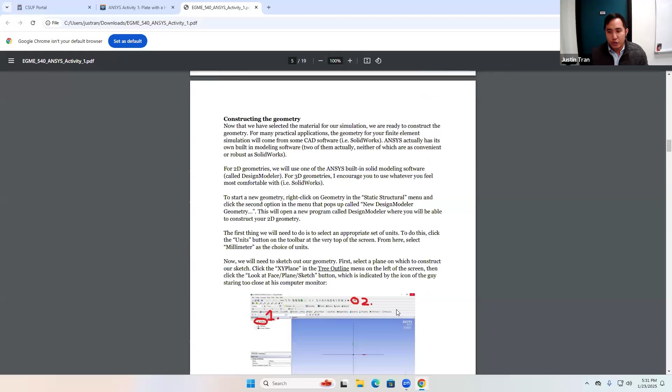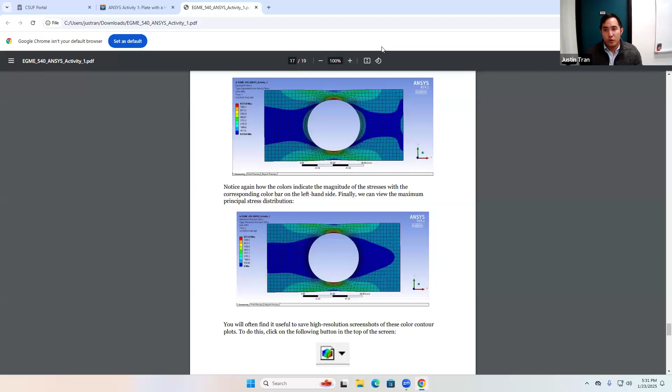So we'll be going through the whole process today, starting with the basics of booting up ANSYS, what you're looking at, all of the interfaces, because ANSYS is not the most user friendly. It's very feature packed, but sometimes sifting through all those features to get to the part you need can be a little difficult. This is kind of your first exposure to ANSYS, so if you have no experience with it, this is going to be great. If you've used ANSYS before, just follow along.

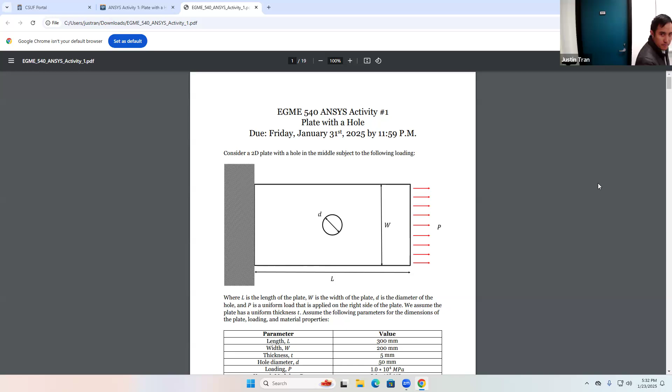Any questions on anything before we get started for today? Does ANSYS installed in this computer? Yes, they should be. So that is the first thing we're going to do, finding ANSYS is not the most straightforward. We'll open it together. Any other questions before we get started?

Okay, let's go ahead and get started. The first thing we're going to do is open up ANSYS. Now, if you had a chance to install it on your own computers, you'll see that ANSYS is actually a collection of a dozen or so different programs all meshed together. So to actually open up ANSYS, we need to open what's called the manager program.

The manager program in ANSYS is actually called Workbench. So if you're on a Windows machine like this, you can search up Workbench, or just type 'work', and hopefully it should pull up the application for you.

The lab computers here, because we renewed our license back in August of last year, should be running 2024 R1. But I think the most recent student version online is 2025 R1. There's really no difference between the versions, at least for what we're going to be using. All the features are going to be the same. The only issue you may have is if you're switching between versions.

So let's say you start working on something in class, and then you take it home and work in 2025. Just like SolidWorks, you could upgrade, so you can take your 2024 files and open them up in 2025. You cannot do the reverse. You can't start something in the 2025 version and bring it back to 2024. It only goes in one direction.

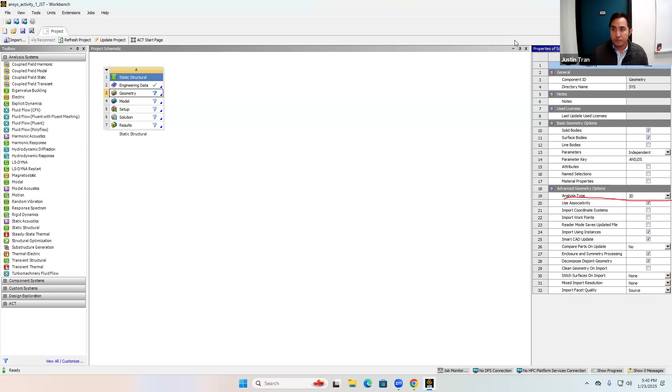We're going to go to one particular line, which should be line 19 for analysis type. Right now it's set to 3D because 3D is the default, but we're going to go ahead and change this to 2D. So again, in most cases you're not going to have to do this, but this activity is just a little bit special because it's a 2D analysis.

Next thing we're going to do before we make the geometry, let's go ahead and specify our material properties. Remember, we talked about on Tuesday that material properties is an important part of every FEA simulation because it defines how your structure is going to deform.

So to define the material properties, we're going to double click on this entry right here called engineering data. Let's go ahead and double click on that. It's going to be a little bit disorienting because it's going to change your entire screen, but it's going to bring up the material window.

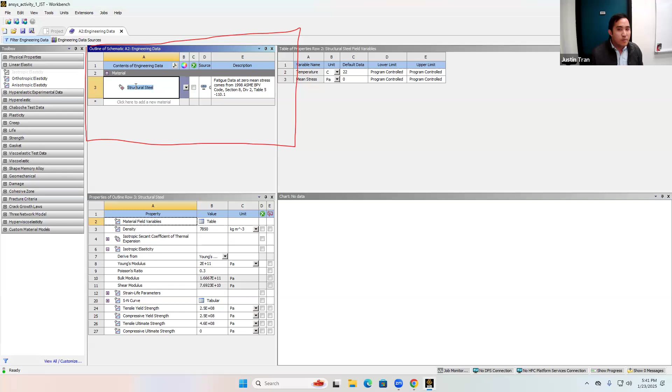First thing we're going to look at here is just the outline of the different materials that we have. You can see we have just one material loaded right now, which is structural steel.

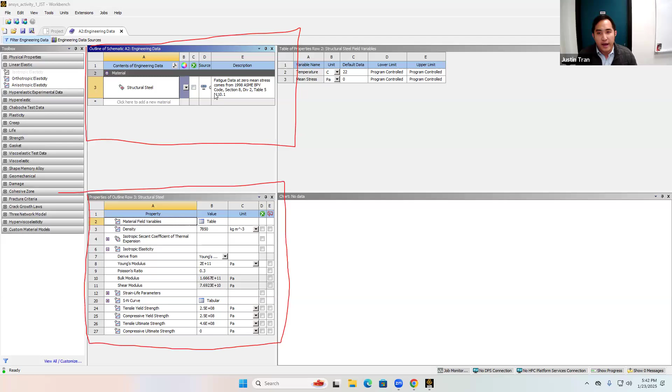But if you wanted to add multiple materials to your simulation, you would be able to add it up here. Next place we're going to look at is in the bottom middle of the screen, which shows you all of the numerical properties of that material. So you can see from this window here, these are the properties for structural steel.

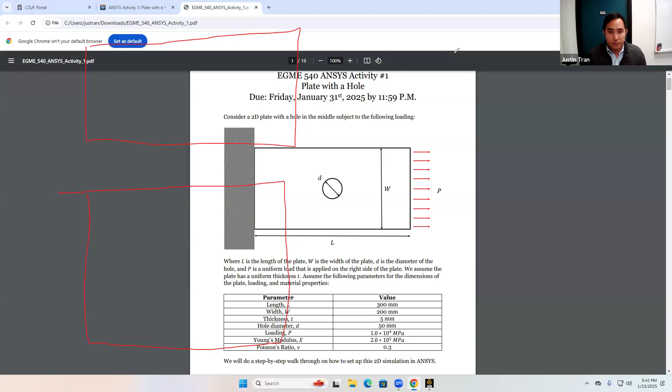So for our cases, let me bring back the project specifications for a second. We want to make sure that all of the material properties are consistent with this material here. So for this material, we want a Young's modulus of 2 times 10 to the 5th megapascal.

And we want a Poisson's ratio of 0.3. So these are the two material properties we want to make sure that we have loaded for our project. Okay, so let's come back to workbench here and let's look at the Young's modulus and the Poisson's ratio.

So the Young's modulus for structural steel you can see is 2 times 10 to the 11th Pascal, and the Poisson's ratio is 0.3. Now we can see right away that the Poisson's ratio is what it needs to be, 0.3. The Young's modulus is actually correct too, it's just that it's in the wrong units here.

By default, ANSYS here will display everything in standard SI units, and the SI unit for Young's modulus is Pascal. But if you want to display this in megapascal, you can come to this drop-down menu, which will let you convert that Young's modulus to different units.

So let's go ahead and convert this to megapascal, just so we can check that it's the right one. And so when we change the units to megapascal, you can see our value updated here to 2 times 10 to the 5th, and that is exactly the Young's modulus that we have.

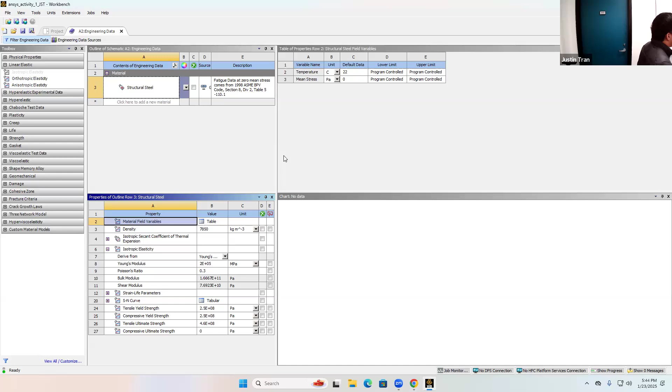So for this project, we're not going to be doing any changes to the material properties, but we are going to do this for activity 2. I just wanted to show you where this was for this project. Any questions on the material properties?

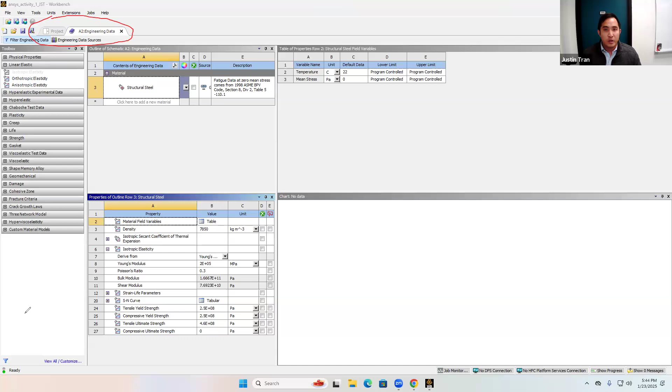Okay, when you're done with the material properties and you've verified that everything is good, we can go ahead and close out of this window. If you go to the top of the screen, you can see there's a couple of tabs here.

We want to close the tab for engineering data and bring back our project menu. So the next step is we're going to construct the geometry. This part is a little unique because usually we won't be constructing the geometry ourselves, but since this one is so simple we're just going to do it from scratch. One of the activities at the end where you work on your own is modifying your geometries, and that's only possible if we make it ourselves.

To create a new geometry, you're going to right-click on geometry from the project window, and then click on New Design Model or Geometry. So let's go ahead and do that.

That's going to open up a new window, which is a separate program that ANSYS runs. ANSYS is kind of a collection of a dozen or so different programs, and Design Modeler is one of those programs.

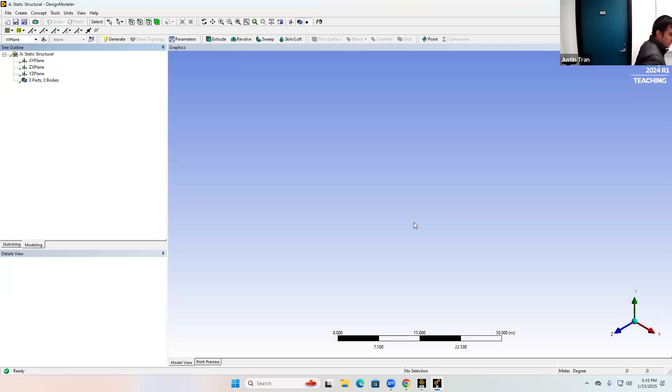So was everyone able to open up Design Modeler? Is everyone seeing this window? Cool, okay, so let's go ahead and draw our plate here.

Our plate has a fairly simple geometry, just a rectangle. We have the dimensions here: the length of the rectangle is 300 millimeters, the width is 200 millimeters, the thickness - going into the page - is 5 millimeters, and the diameter of the hole is 50 millimeters.

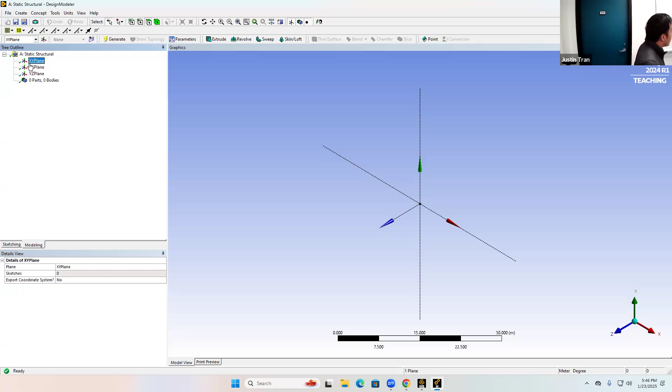Okay, so first thing we need to do is draw our sketch. You can draw the sketch in any of the 3 principal planes, but I think it's easiest to sketch things in the XY plane. So let's go ahead and click XY here, and you can see the XY axes show up.

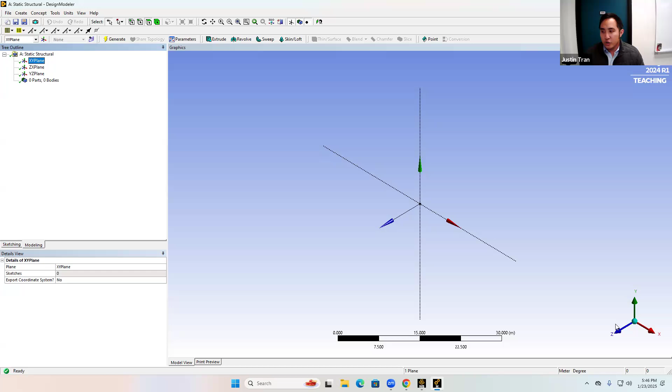Let's change the viewpoint so that we're looking straight onto the XY plane. The easiest way to do that is to click on the Z arrow in the bottom right-hand side of the screen. When we click that, you'll see our perspective shift so we're now looking straight down the Z axis, parallel with the XY plane.

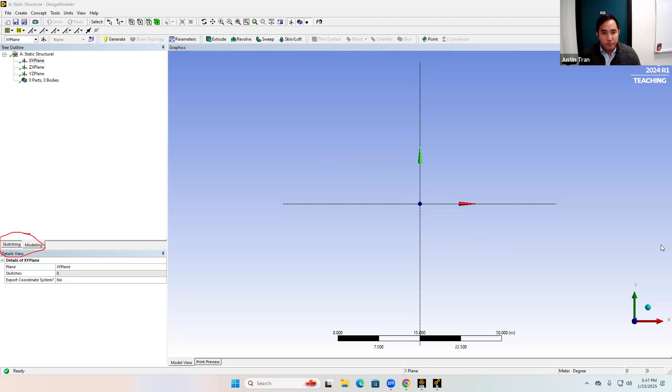To start sketching, come to the left-hand side of the screen. There's a small tab here called Sketching - this thing's kind of in the way. Let's go ahead and click on that tab. This opens up a set of very basic shapes that you can draw.

Actually, before you start drawing, let's make one important change to make things a bit easier. Come up to the top - there's an entry at the top called Units. We want to change our units to something convenient. The default is to define everything in meters, but since our dimensions in the PDF are given in millimeters, let's change the dimensions to millimeters. I'll click on Units, go to Millimeter. Now everything we do is in terms of millimeters, which will make things easier when we dimension.

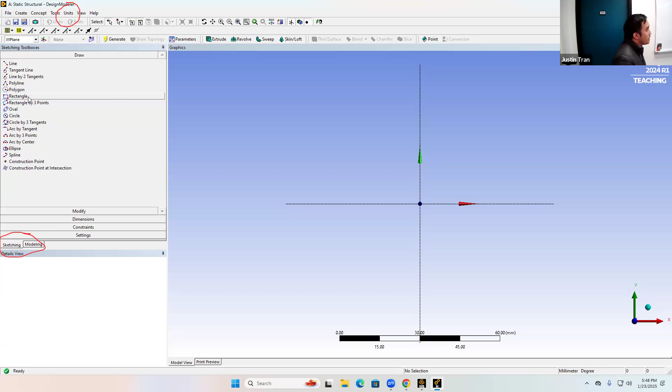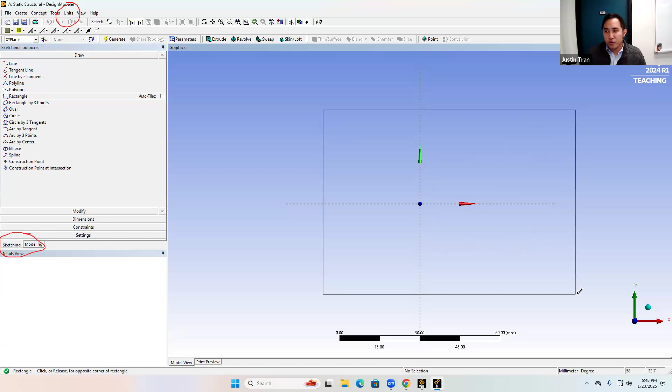First thing I'm going to do here is draw a rectangle, so I'll click on Rectangle. That changes the cursor to kind of a pen, and you click once to draw one corner of the rectangle, then click and drag. You want to make sure you encompass the origin, just to make things easier. Then when you're satisfied with your rectangle, click again. Don't worry about sizing it just yet - we're going to apply dimensions ourselves. You just want to make sure the rectangle is out.

Good. Bless you. Okay, so I'm going to go ahead and clear my sketches.

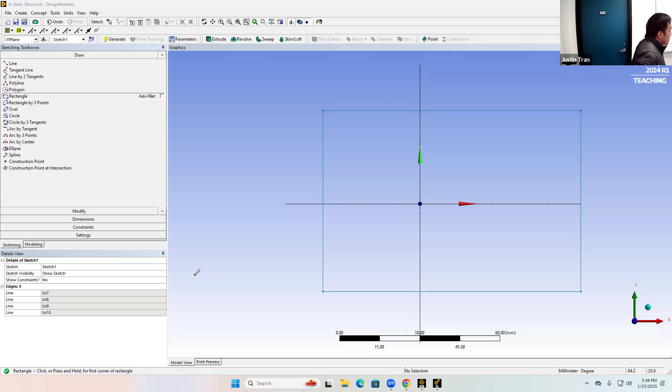Next, we're going to dimension this rectangle to make sure it has the appropriate height and width. To dimension a shape here, you're going to click on dimensions, and that's going to change the menu. The dimensions window, just like you've probably used in SolidWorks, will help us specify the lengths of certain edges of our geometry. We're going to use the general tool, so click on general here.

In the window here, you're going to click on one edge of the rectangle to indicate that you want to specify a dimension there. Then click and drag a little bit outwards and click again. You can see we've created a new dimension called H1. It's kind of hard to see, but now we can specify the length of that side.

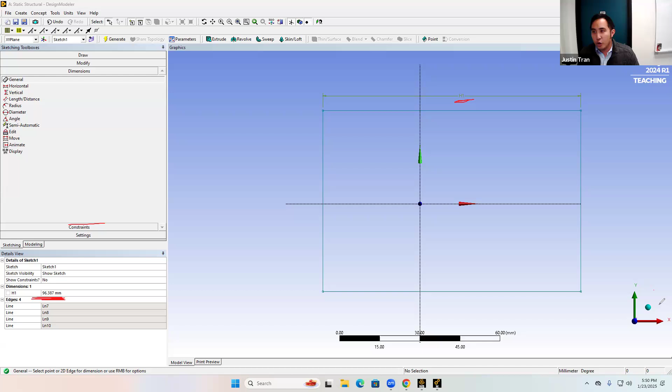Now this is probably going to be a little different for those of you used to SolidWorks. Normally in SolidWorks you can define the dimension straight in the window right here, but for ANSYS, you actually specify the dimension in the bottom left-hand side of the screen. If you look at the correspondence, you can see we have our variable, our dimension H1, and right now it's set to 96.387 millimeters.

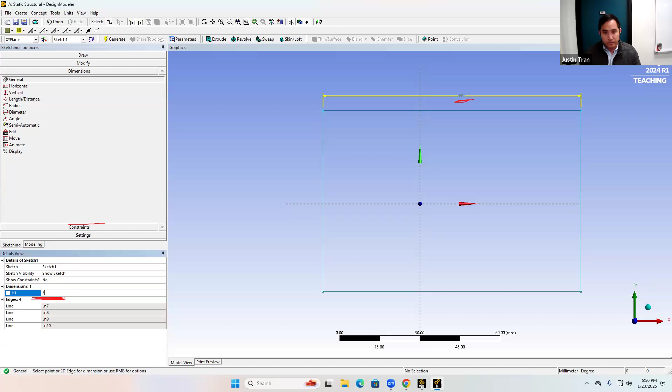Let's go ahead and change this. From our document here, we know that the horizontal length of the rectangle is 300 millimeters, so let's change this length to 300. Go ahead and hit 300 on your keyboard and hit enter, and you can see that now the length of our rectangle has changed quite a bit.

By the way, if you want to pan the screen, to slide it back and forth, it's a little non-intuitive, but the way you do it is hold Control on your keyboard, and then hold down the middle click on your mouse. That's how you can drag it left and right, because if you don't do that, you're going to rotate, which is not useful. So make sure you hold Control and then hold the middle click.

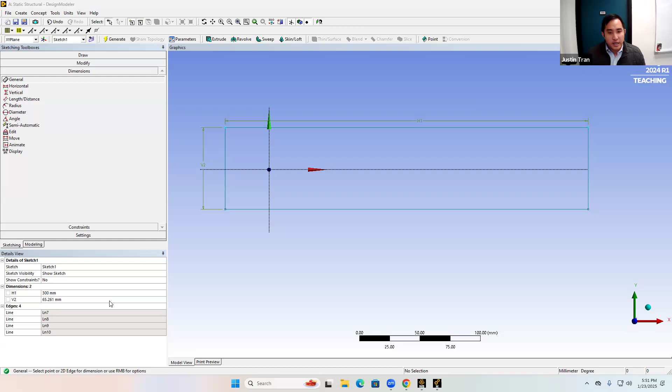So we've gone ahead and set the dimension for the length. Let's set the dimension for the height as well. Just like before, make sure we have our general dimension tool selected. Click on the vertical edge of the rectangle, drag it out. Let me clear my drawings here. We've created a new variable called V2, and we're going to set that dimension equal to 200. Once again, hit 200 and then hit enter.

Now our rectangle is the appropriate size. Last thing we're going to do before we draw our hole is make sure it's centered on the origin. Any questions on this so far?

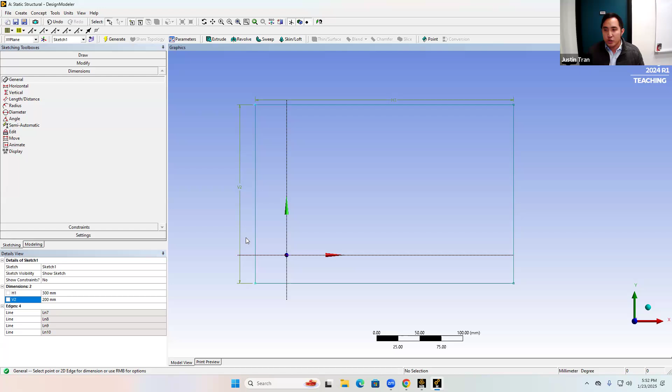Next, let's use the dimensioning tool to center this rectangle on the origin, because right now it's kind of off center. To center the rectangle on the origin, we're going to make use of these other dimensioning tools, starting with the horizontal one. The horizontal dimensioning tool specifies that two features of your geometry are separated by a certain distance. The two features we want to separate are one of the vertical edges of the rectangle and the y-axis, which lets us specify the horizontal distance between those two features.

We want to set that to be half of the length. You can see we've created a new variable, H3, so we set that to 150. That's going to center the rectangle from left to right. Remember, you can only do that with the horizontal dimensioning tool selected.

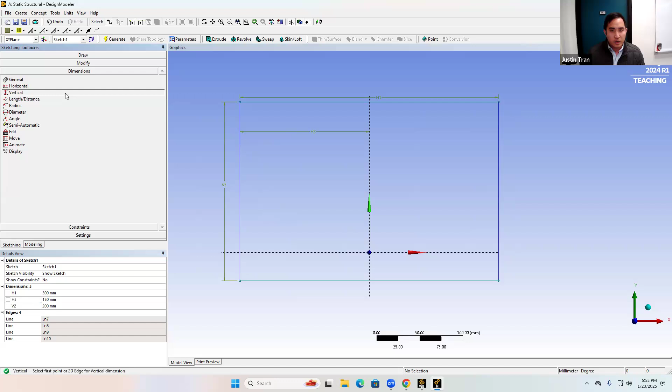So let's do the same thing with the vertical tool. Click on vertical dimensioning, click on one of the horizontal edges of the rectangle, and then click on the x-axis. We want to specify the vertical distance between those two lines.

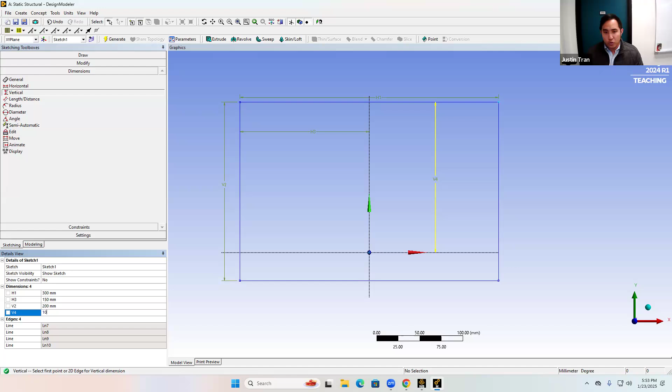Right. And then just like we did with the previous one, let's set that to be half of the height. Half of 200 is 100, so let's click 100. Okay, so now we have our rectangle that's centered appropriately, with the right length and width.

Coming back to ANSYS DesignModeler, go back to the Draw tab. We're going to draw a circle this time, so click on Circle. Come to the origin—your mouse should snap to it since it's a point of interest. Click once on the origin to start drawing the circle, then click and drag outwards to change its size.

Again, don't stress too much about the size—we're going to dimension it in a second. You just need to have the circle there. Okay, so we've gone ahead and drawn our circle.

Let's go ahead and dimension it. Go back to the Dimension tab, click on General, and you can click anywhere on the circle to specify the diameter. That creates our fifth dimension, D5. Let me double check the diameter—the diameter of the circle is 50 millimeters, so let's specify this as 50.

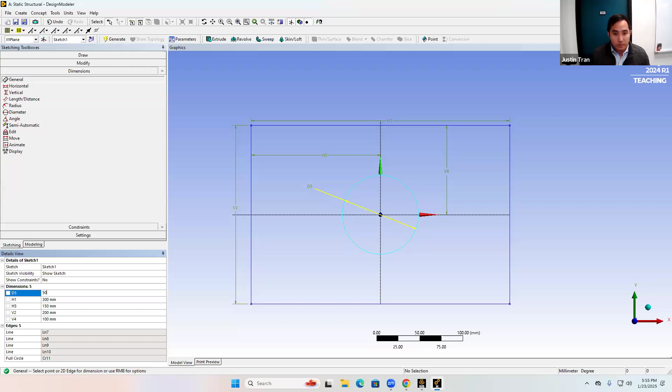All right, and so that is our sketch for our plate with the hole. Any questions so far?

Okay, cool. All right, so let's go ahead and turn this into a solid here. To do that, once you're done dimensioning the circle, let's go back to the Modeling tab. So click on Modeling right there.

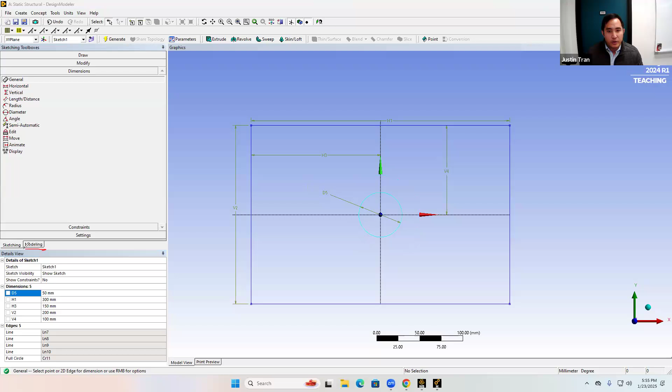If you expand the menu for the XY plane, you can see that we have one sketch, which is the one we just drew. To turn this into a solid, come up to Concept at the very top menu. Under Concept, there's an option called Surface From Sketches—that's what we want, to turn this sketch into a surface. Click on this, and it's going to create a new object in the tree outline called Surface SK1. Let's go ahead and click on that.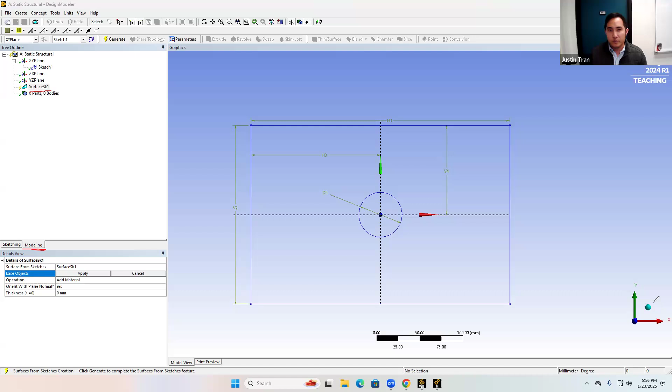Inside Surface SK1, it's going to ask you to define a base object. The base object for our operation is the sketch we just drew, so go ahead and click on Sketch 1, make sure that's highlighted, and then click Apply in the bottom left. That changes the base object for our operation to Sketch 1.

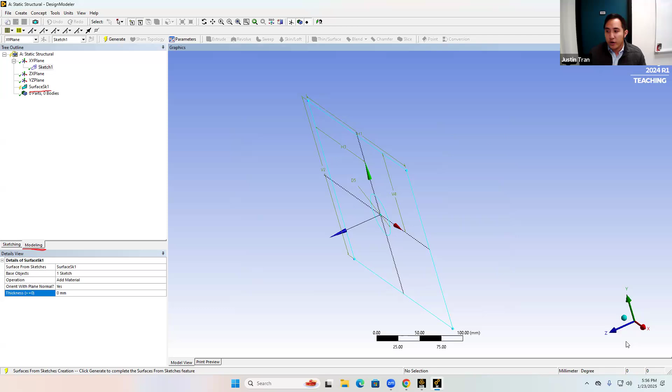The next thing we're going to do is specify a thickness—remember, thickness is the thickness of the plate in the Z direction. If we come back to our PDF here, we can see the thickness we need to specify is 5 millimeters, so let's go ahead and do that. Under the option for thickness, we'll specify this as 5 millimeters.

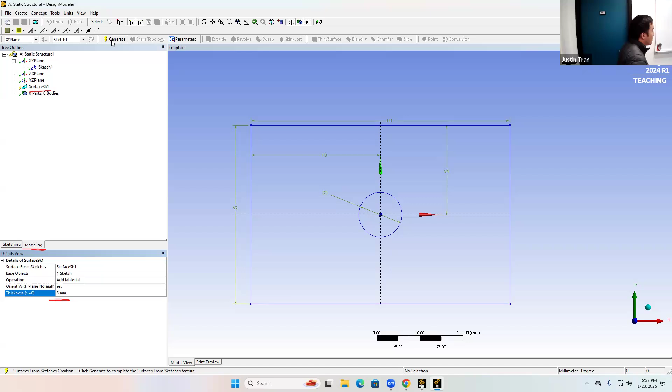Then when all that's done, go up to the middle of the screen—there should be a yellow lightning bolt that says Generate. Let's click Generate, and that will produce your plate. Now it should be very thin—that was kind of the point. It only has a thickness of 5 millimeters, but you should see the plate filled out where it's solid.

Any questions on this? Is everyone able to get our plate with the hole here?

Okay, if you've constructed your plate and it is nice and solid, you can go ahead and close Design Modeler. Now you want to be careful here: don't close Workbench, just close Design Modeler. They are separate windows.

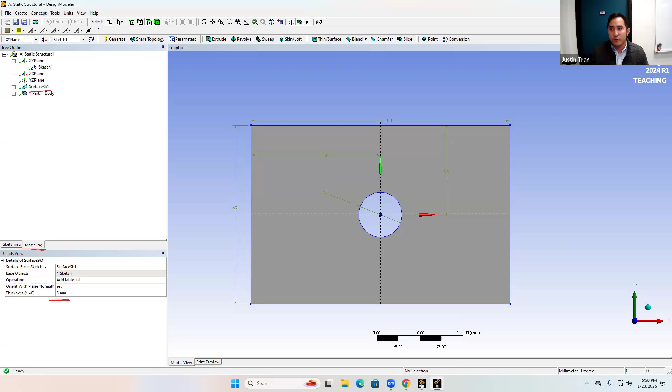If you're paranoid like me, you can minimize Design Modeler and then click the X here, so the X's aren't overlapping each other. I've totally done that before, a lot of times where I've closed the wrong window.

Go ahead and hit save, just to make sure that your geometry is saved. If you did everything correctly, the geometry portion of your project should now have a green check mark. That's ANSYS telling you that your geometry is good. This is a convention ANSYS uses a lot, so you're going to see these green check marks quite a bit, and when you see one, that means it's usually good.

So to actually run the simulation, we need to open a separate program called ANSYS Mechanical. The best way to open that is to double click on model here. If you look at this list, model is the next step, with a kind of green refresh mark there. Let's go ahead and double click this, and that's going to open up another program.

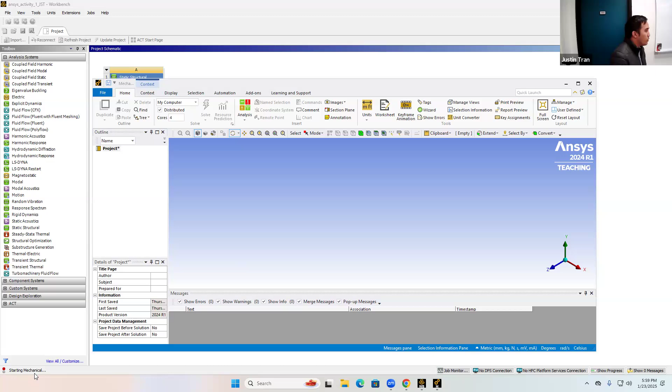By the way, if you're not sure if ANSYS is actually working or if you clicked on something, look at the bottom left-hand side of the screen - if ANSYS is working on something, it'll usually tell you down there. On my screen there's a little message that says starting mechanical. A lot of times the programs in ANSYS take a while to run, so if you don't see anything down there, maybe double click again or restart the click.

If you open up mechanical, you should see a different window. But the nice thing is that your geometry should be loaded into ANSYS Mechanical, so you should see your plate with the hole pop up here.

All right, did everyone get ANSYS Mechanical open and has your geometry there? Question? Yes.

Okay, so we are now in ANSYS Mechanical. This is probably where we're going to spend most of our time in ANSYS. If you look at the left-hand side of the screen on the outline, this is almost always a useful place to look, because all the information about your project will be given here. This is especially useful when we start working with assemblies of parts - you'll be able to see all the parts, assign material properties, do our meshing, and so on. So this project outline is good to be familiar with.

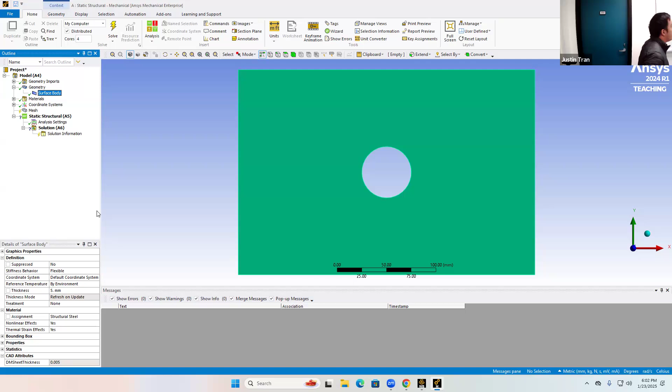Next thing we have here is the materials tab. If you wanted just a summary of the different materials that you have here, okay, again we just have one material loaded, which is structural steel.

When I open it, it's a completely different looking program. So you're going to double click on model from Workbench. If you double click on geometry again, it's going to open up a different tab software.

Sorry about that, sometimes I get so focused I miss people. Don't be afraid to shout my name because sometimes I get too distracted and I don't see people. So if you're raising your hand and I don't see you, just say hey, then it'll catch my attention.

Okay, so under materials here, you can see the different materials that you have loaded. We have structural steel, and you can see a summary of its properties like the Young's modulus, the Poisson's ratio, the bulk modulus, the shear modulus, things like that. For most cases, we only really concern ourselves with these two material properties: Young's modulus and Poisson's ratio. For a linear isotropic material, that's all you need, but it's useful to know some of the other ones as well.

Oh, it's fine. So Pascal and megapascal, they're both the same. So as long as it's 2 × 10¹¹ Pascal, it's fine.

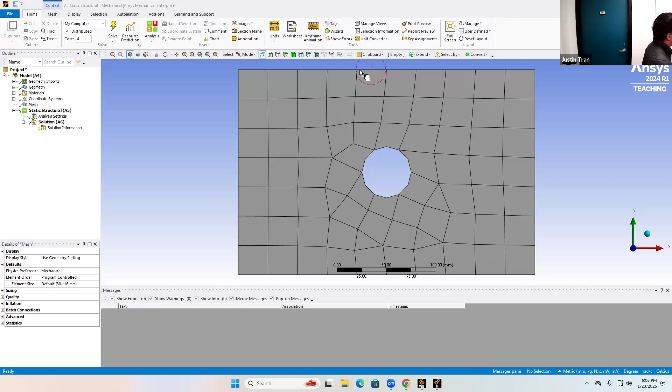All right, so this is a basic mesh here. I would say this is not a very good mesh, the reason being that this mesh is very coarse. Remember we talked on Tuesday, generally the more elements that you have, the more accurate your simulation is going to be. So a coarse mesh like this probably isn't going to give you the most accurate results. Let's refine our mesh.

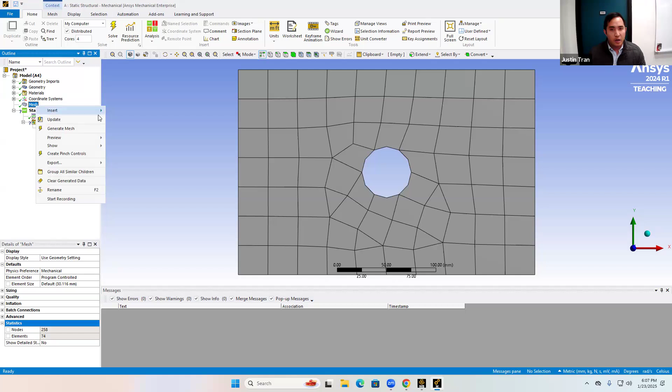Let's make it so that our mesh has some more elements. To refine your mesh, we need to modify the sizing of the mesh, we want to modify the size. So to modify the size of the elements, you're going to right click on mesh, go to insert, and insert what's called a sizing setting. Click on sizing.

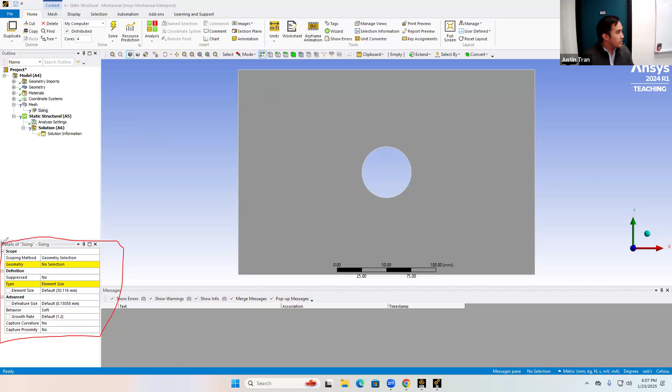This setting is going to allow you to change the size of elements. I would say this standard is pretty common in ANSYS. Whenever you want to change something about your mesh or your boundary conditions, you kind of have to do it in 2 steps. Step 1, you specify which parts of your geometry you're going to apply that setting to, and step 2, you specify the actual setting itself.

Notice how in the bottom left here, there are 2 boxes highlighted in yellow. First, let's specify the geometry where we want to change the setting. For this case, we actually want to apply this mesh sizing to the entire mesh. So you're going to click on your object here, and it should highlight all green. After that, you're going to go to geometry and click on no selection here.

That's going to open up another menu, saying either apply or cancel. Then you're going to click on apply. After you do that, it's going to say that this setting is going to be applied to one face, that one face being our entire geometry.

Now for other projects, you can apply certain settings to certain areas of the mesh, but for this case, our geometry is so simple, we're just going to apply it to the entire thing.

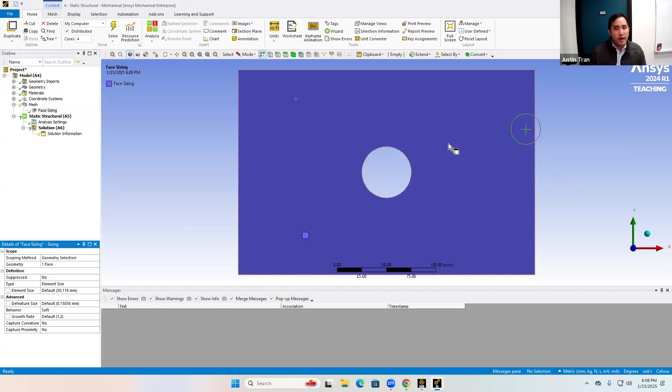Next thing we're going to do is we're actually going to change the size of the mesh. You can see right now the default size is about 30.1 millimeters, so let's make this smaller. You can change this to anything that you want for this activity, as long as it's smaller than 30, it's fine. Let me change the mesh size to 10.

Let's see how that's going to affect our mesh. If you want to use the same as me, you can use 10, but feel free to use whatever you want, just don't use something super small, don't do something like 0.1. Otherwise your simulation will be running for days.

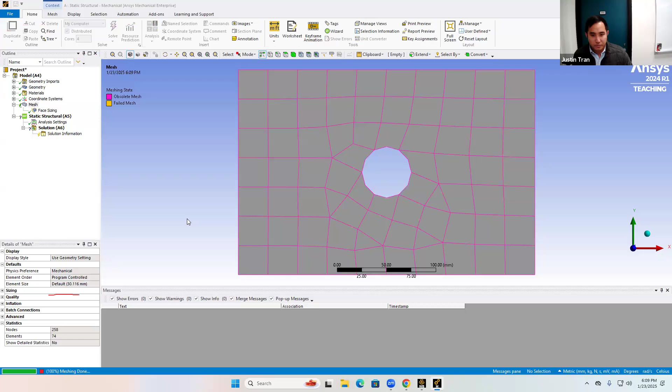After we change that setting, let's go ahead and generate the mesh again. You can see after doing so, our mesh looks much, much better in this case. Our elements are smaller, we have a much smoother mesh. The hole doesn't look as pixelated as it was before, we actually have a nice smooth curvature.

So you can see refining the mesh actually gives us, we can already see it's going to give us better results. Question: the goal is to have as much uniform shape as possible during meshing?

That is a goal, although for complicated geometry, that's almost impossible to do. In the next few weeks, we're going to talk about what makes a good mesh. But for now, something in the ballpark of 5 to 10 millimeters is good.

I think probably what happened for you is that it thinks that your mesh is a 3D mesh. So you need to go back to Workbench, close Mechanical, then right click on Geometry here, go to Properties, and make sure that this analysis type here is 2D. I'll come check around with you in a bit.

Good question. So if you want to change your units in Mechanical, you're going to go to Home up here, and then click on Units. Units is in a different spot, that's kind of the annoying thing with ANSYS, that they don't put things consistently in the same place. Then you can change the units here, there's different units for metric and different units for US customary. Any of the millimeter ones are good.

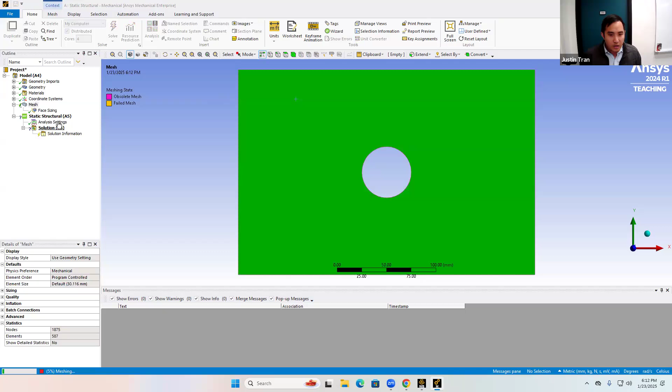If you want to play around with this a little bit, let me go ahead and change this to 5 millimeters, so our mesh is going to be even more refined. What you should see is that the number of elements is going to jump up. After changing the mesh size to 5, the number of elements is now 2,251.

But don't go too crazy here - don't set the mesh size to 0.1, otherwise you may crash these computers, and that has happened in the past. So you want to be careful.

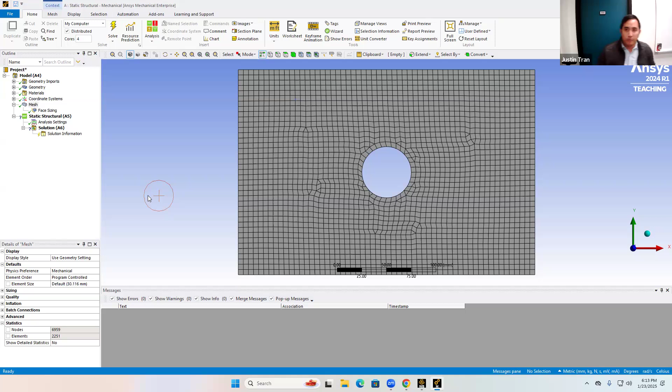When you're talking about your mesh, the sizing is probably one of the more important settings that you're going to do. But there are other settings for the mesh as well. Let me go ahead and change this back to 10 millimeters.

Another thing you can do for your mesh is specify the shapes of the elements. To specify the shapes, you can right click on mesh, go to insert, and insert another object called the method. Once again, the method is going to ask you to specify the geometry for your setting, so I'm going to click on the entire geometry here and click apply.

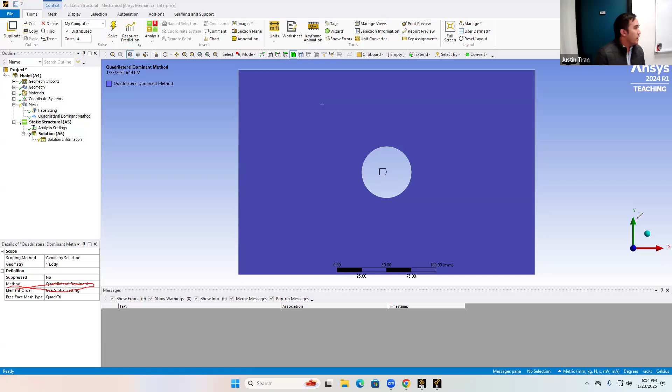From here, you can specify different settings for the mesh itself. Probably the only one you'll be able to see a difference for today is the method. The default method is called quadrilateral dominant, meaning it's going to try to produce a mesh that's mainly rectangular or quadrilateral. You can change this.

If you want a triangular mesh, you can change the setting from quadrilateral dominant to triangles. That's going to change your mesh to be all triangles instead of quadrilateral. I'll go ahead and show you that really quickly - now our mesh is completely made up of triangles instead of quadrilaterals.

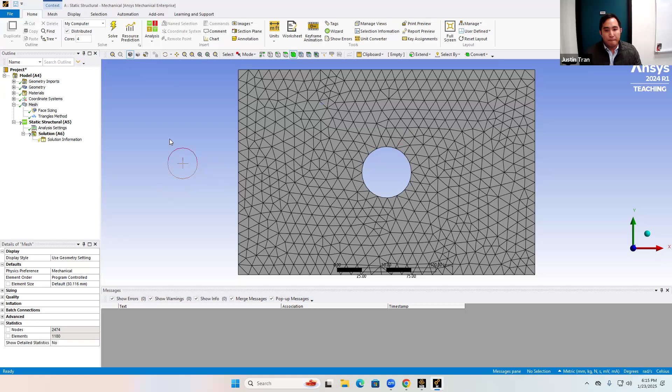Let me go ahead and change it back to quadrilaterals, just because quadrilaterals are a bit nicer in this case, since our object here is kind of quadrilaterally shaped.

In a couple of weeks we'll talk about the different element shapes and what that actually means. Another setting here that we'll commonly come back to is called the element order. Don't worry about the order just yet - you can leave that on the default, but just know that we can change that as well.

Any questions on this so far? Okay, good.

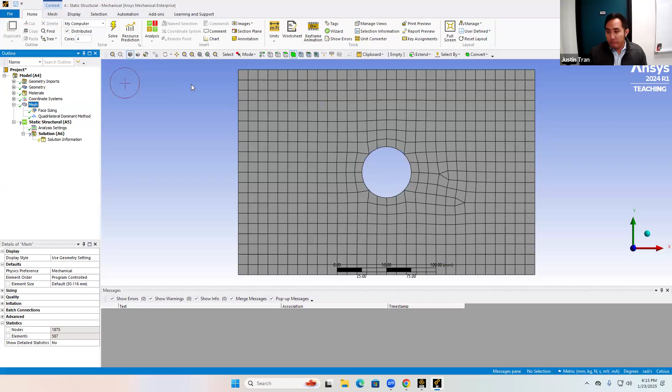Okay, 30 minutes. In the interest of time, I'm going to move on. There is one smaller thing I want to show, but we'll come back to it.

The next thing we need to do is specify the boundary conditions on our mesh. Coming back to the project specifications, we have two boundary conditions to specify: the left-hand side of the plate needs to be fixed to a wall, and on the right-hand side we need to apply a tensile pressure.

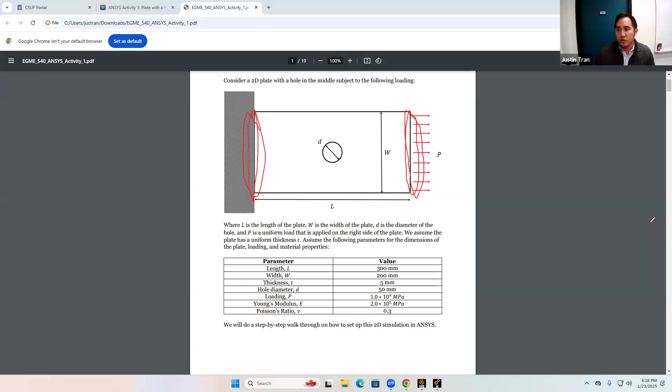To apply boundary conditions in your ANSYS simulation, come to Static Structural A5. Just like we did with the mesh, we're going to insert settings by right-clicking. Right-click on Static Structural A5, go to Insert, and first we're going to specify a fixed support.

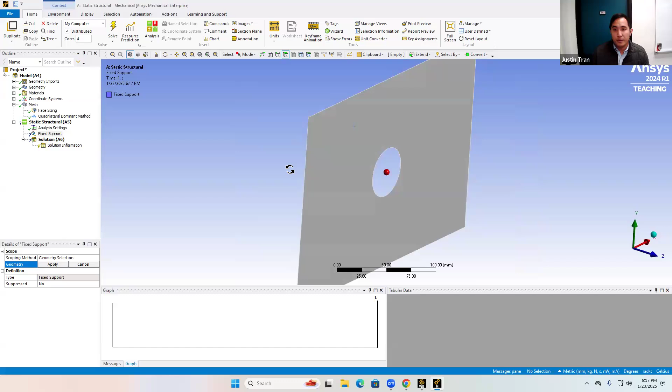If you read the tooltip for fixed support, it inserts a fixed support boundary condition that prevents a certain geometry from moving or deforming. That's exactly what we want on the left-hand side, so I'll click on fixed support and apply it to the left-hand side of our geometry. You may have to rotate it since it's a very thin line to click.

If you're having trouble clicking on that line, you may need to change the selection mode of ANSYS. In this case we want to click an edge, so make sure you're in edge selecting mode. You can also hit Control E on the keyboard.

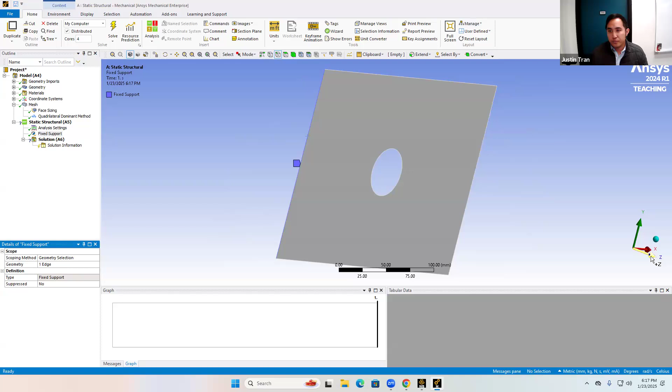Mouse over that edge, and when you click on it, it should highlight green. Make sure you just catch that edge, then hit Apply in the bottom left. That should specify that you want your simulation to be fixed on the left-hand side.

Next we want to insert a load, making sure we insert our tensile load here. Coming back to the project specifications, we can see our pressure has a magnitude of... actually, I think that's a typo there. It should only be 1,000 megapascal.

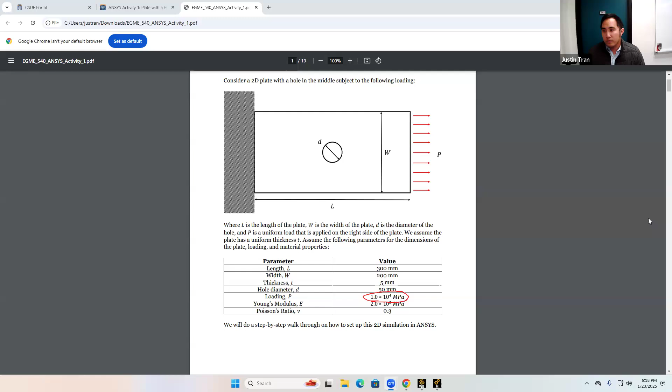So if you come down here— oh, I didn't fix this. The pressure should only be 1,000 here. I apologize, I'll upload a fixed version.

Let's go ahead and apply that pressure. To apply a pressure boundary condition, right-click on Static Structural A5, go to Insert, and then Pressure. Right-click Static Structural A5, insert pressure — that's going to create a pressure object here.

Just like we did with the meshing settings, we're going to specify the part of the geometry — we'll apply this on the right-hand side of the plate. Go ahead and click that edge and hit Apply.

Question, yes — I think the loading is correct. You have 1 times 10 to the 4th here on your activity. Oh, that's good. Yeah, it should be 1 times 10 — yeah, it should only be 1,000. So 1,000 is 1 times 10 to the 3rd.

So for the magnitude of the loading here, let's specify 1,000 megapascal. You can do 10,000 if you want — it's not going to change the result all too much. Well, it will — all your deformation will be 10 times greater. But 1,000 is good for this.

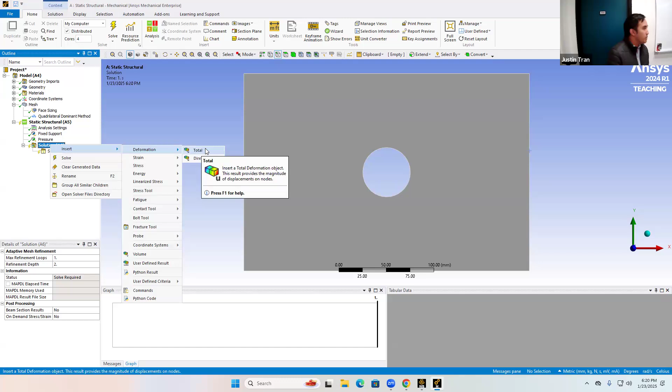Before you run the simulation, right-click on Solution A6 and go to Insert. You can see there are lots of different results you can show for any finite element simulation, but for this one we'll keep it simple. The two results you'll almost always view for this class are the total deformation, so right-click on Solution A6, go to Insert, Deformation, and click on Total.

The other one you're going to specify is the equivalent stress. Right-click on Solution A6, go to Insert, Stress, and then go to Equivalent Von Mises Stress.

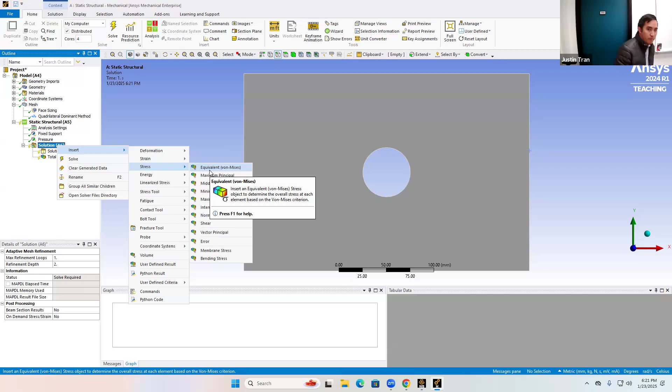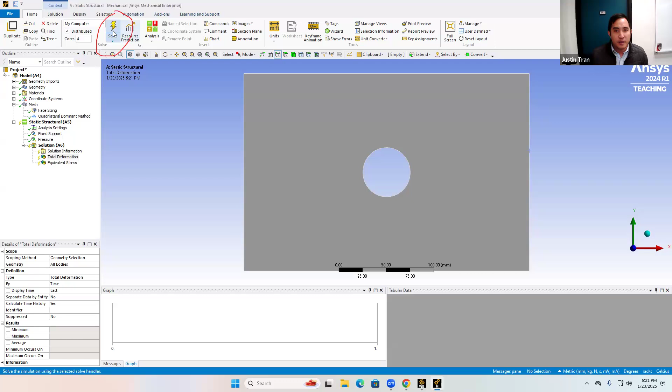After you specify those two output variables, let's go ahead and solve. To solve your simulation, you can do it a few different ways. You can right-click on Static Structural A5 and solve, but I like clicking on the big glowing button up here, so I'll do that. There should be a button with a lightning bolt that says Solve—go ahead and click on that.

That's going to go ahead and solve your simulation. It might take a couple minutes or so, maybe about 10 seconds.

Was everyone able to get results here? Okay, good. Actually, let me correct this real quick because the result should be tensile, and I think I know why—I kind of skipped ahead in the document. Right now our pressure is being applied compressively, applying like this, because usually when you apply a pressure boundary condition, the default is to make sure the pressure pushes into the model.

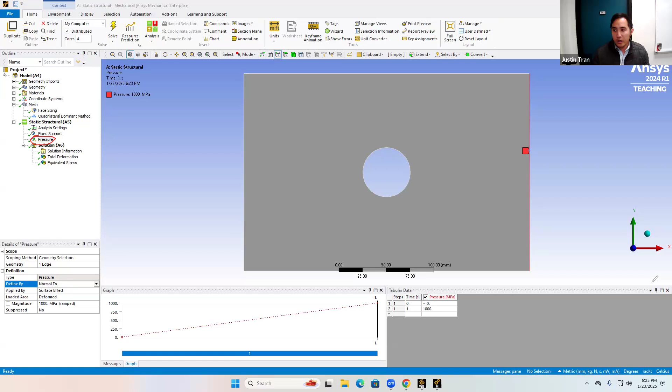To make sure the pressure actually goes out, you can do this in one or two ways. To change the direction of pressure, click on the pressure boundary condition, then go to the bottom left-hand side of the screen to the Define By setting. Right now the direction of the pressure force is defined as being normal to the surface, so let's change that to Components. If you change it to components, you can specify the X and Y components of the pressure. Let's change the X component of the pressure to a positive 1,000—that will apply the pressure in the positive X direction, since we're now applying it by the component.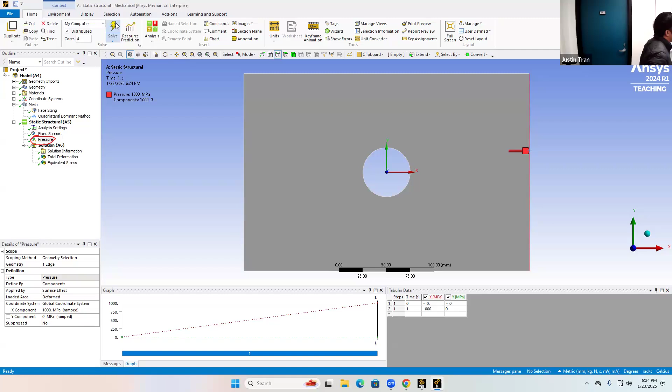Let's go ahead and run the simulation again. What you'll see is that now our plate should be deforming in a tensile manner. When I changed it to Normal To, did I not get the option? You should change it to Components instead—yes, so Normal To was the default, and you should change it to Components instead.

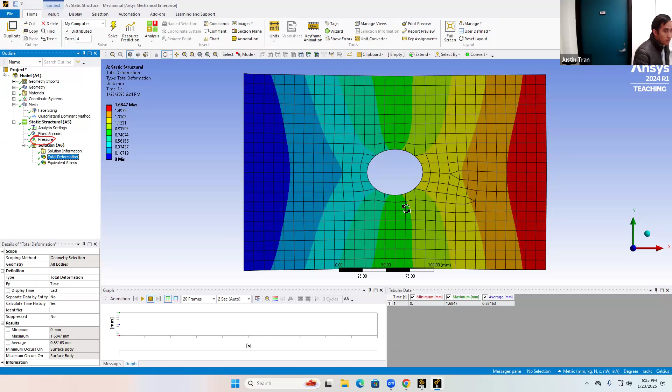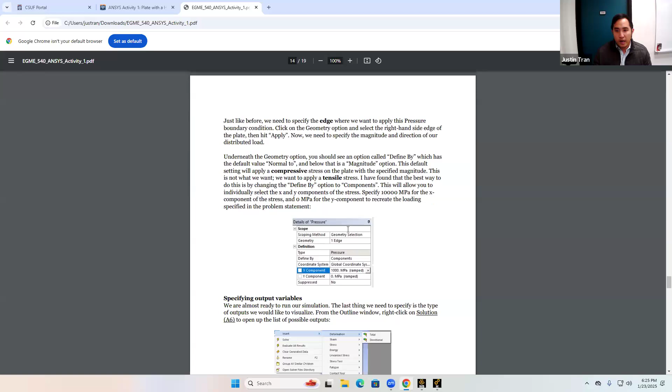Okay, that's most of the activity there. Let me show you what you need to do for the rest of the time. There's about 20 more minutes left. If you come down to the bottom of the page, we've basically done everything from pages 1 through 17.

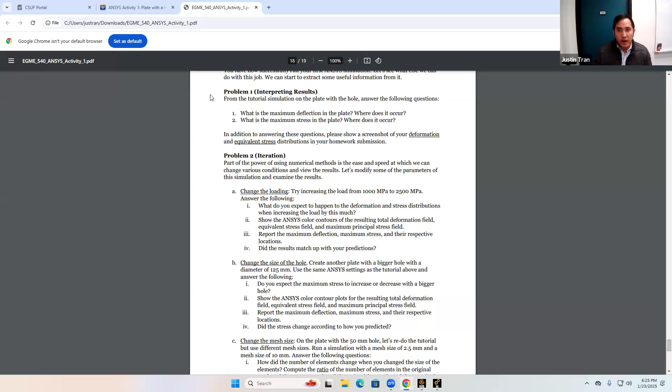So what you guys need to do here is everything down here. I've split your activities into problem 1, problem 2, and problem 3. Problem 3 is just some short answer questions you can answer on your own. But the main thing you need to do is problem 1 and problem 2. So first is problem 1.

For problem 1, I want you to look at your results and interpret what's going on. I want you to answer: what's the maximum deformation or deflection in the plate, and where does it occur? I also want you to answer what's the maximum stress in the plate and where does it occur? And for this question, include a screenshot of your deformation and equivalent stress plots.

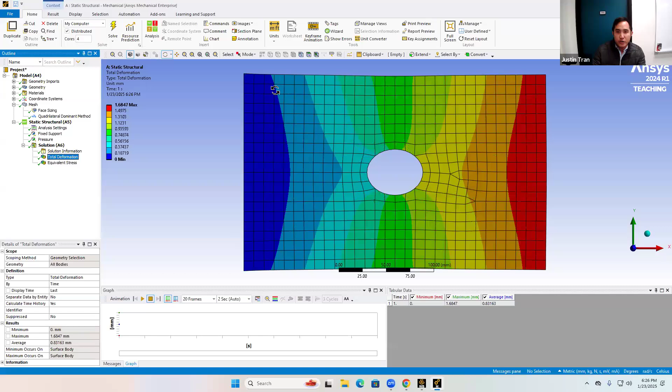So basically take a screenshot of your deformation plot and a screenshot of your equivalent stress field. That's problem 1. You've pretty much done that already, you just have to answer these questions.

For problem 2, I want you to experiment and change a few settings and see how that changes your results. For part A, I want you to change the loading from 1000 megapascal to 2500, and answer some questions associated with that.

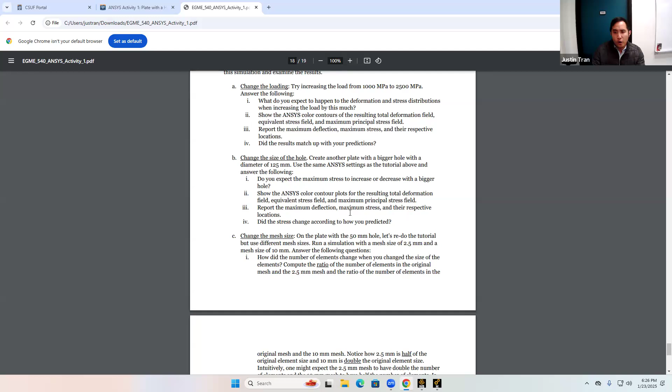For part B, I want you to go back and change the geometry, specifically the size of the hole. The default right now is 50 millimeters, but if you change it to 125, I want you to see how that changes the results.

For part C, I want you to change the mesh size. Run a simulation with a 2.5 millimeter mesh and a simulation with a 10 millimeter mesh, and again answer some questions associated with that.

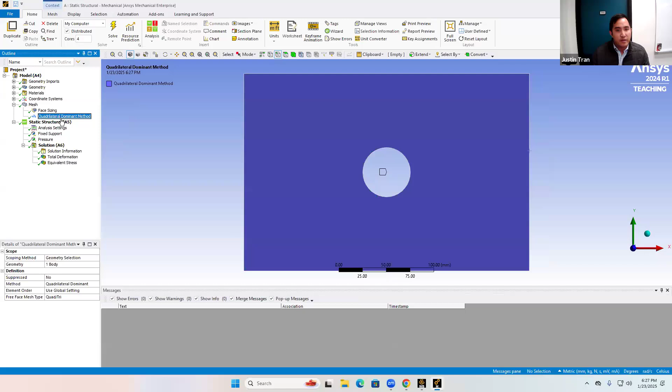For part D, I want you to change the shape of the element to triangles. If you remember from earlier today, under the method object under mesh, you can change the method here to triangles. Run a simulation like that and see how that affects your results.

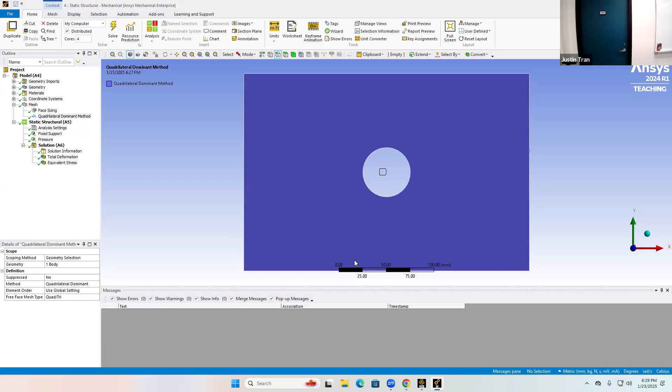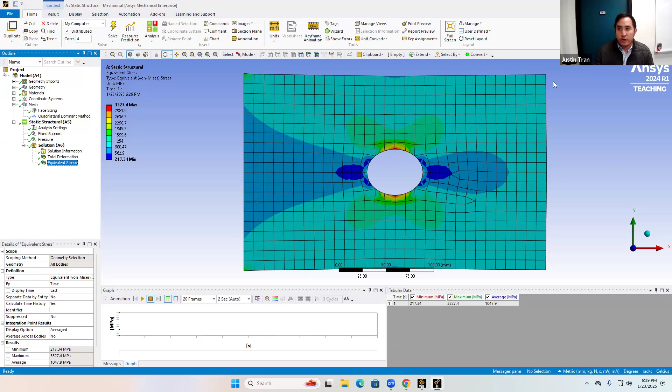Okay, so really quickly before everyone heads out, I do want to show you how to export this back home. To export it, I'm going to go ahead and close Mechanical here. Make sure you save your project. You would think that when you save the project, ANSYS would just give you one file to send home. Unfortunately, that makes too much sense for ANSYS, so it doesn't actually do that.

So actually, if you go to where you saved your project, you'll see that ANSYS saves a file and a couple folders here. There's one file here and then this folder, which actually contains the real files. So you cannot actually move these folders and file back home.

So what you actually need to do is zip it into a single package and send that home. To package it as one file, you're going to go to File back in Workbench and click Archive. Then this is going to save another different file called a WBPZ file.

So go ahead and click Save. For some reason, it already exists—it might be the one I did last semester. Then another menu is going to come up, and you click Archive, and you go back to the folder here.

I'm sorry, I think I archived in the wrong folder. Let's see—oh, it literally is the one I made last semester. Okay, so let's go to Documents here. Archive.

Go to that file location. You'll see there's a file with extension WBPZ - that Z is important. So if you want to work on this back home, this is the file you actually move. You just move this one file, and when you open it up on your home computer, double click this and it'll open up in ANSYS for you.